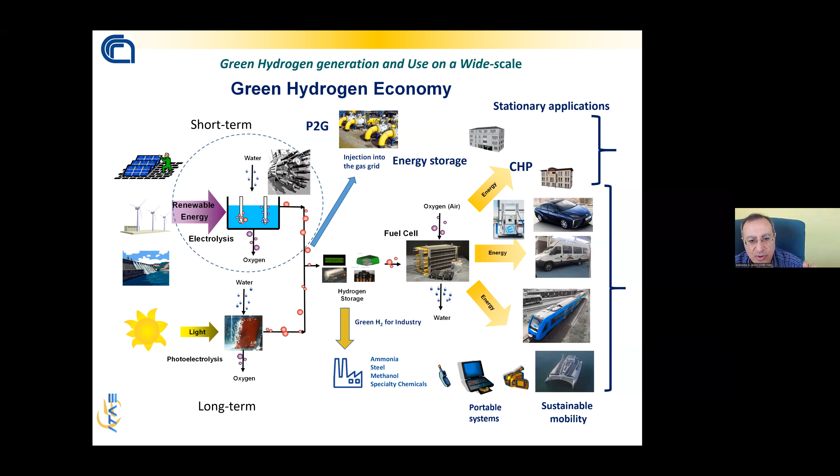And now we can move to the next slide, where I can mention some other important aspects of why green hydrogen is so important. Green hydrogen can provide seasonal storage. That means, especially in small islands, you can store energy for, let's say, 6 months or more. Hydrogen can be used for grid balancing services, because renewable power sources are intermittent, and in some periods we have a surplus of renewable energy. That means hydrogen can convert the surplus of renewable energy into chemical energy that can be stored and used later when needed.

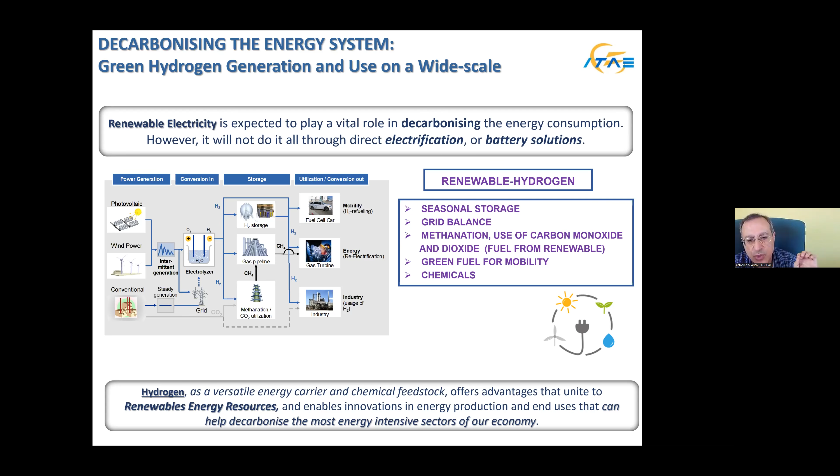Hydrogen can be used for methanation, to convert carbon dioxide into renewable green fuels for mobility and for other applications. So there are several applications of hydrogen. That's the reason why in the European Union, and also in countries like Korea, Japan, the US, Australia and so on, there is a national strategy on hydrogen, because hydrogen is seen as the new energy vector that will contribute to decarbonizing the energy system.

However, we need a reliable technology to convert efficiently renewable energy, especially the surplus of renewable energy, into chemical energy, into hydrogen. And electrolysis is the best approach for that.

So there are several electrolysis technologies. I'm focusing today on low temperature electrolysis. Of course, there is also high temperature electrolysis that has also good perspectives, but at the moment, low temperature electrolysis seems to have slightly better perspectives.

We have 3 technologies for low temperature electrochemical water splitting. Alkaline electrolysis, well-known, mature technology. PEM, polymer or proton exchange membrane electrolysis, and AEM. AEM is anion exchange membrane electrolysis.

The difference is that in the alkaline electrolysis, we use just a porous separator. I'm showing here this porous separator, and we have some recirculation of concentrated KOH, of caustic solution. So this is the approach used in the alkaline electrolysis. And we have at the cathode hydrogen evolution and migration of hydroxide ions to the anode, where we have oxygen evolution.

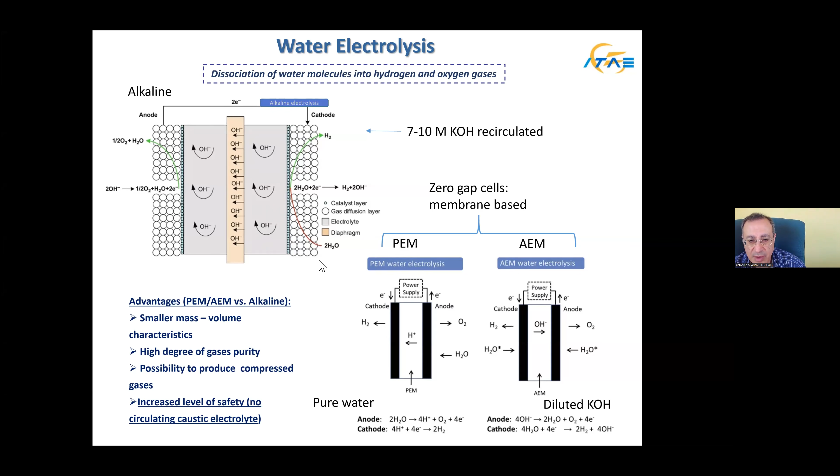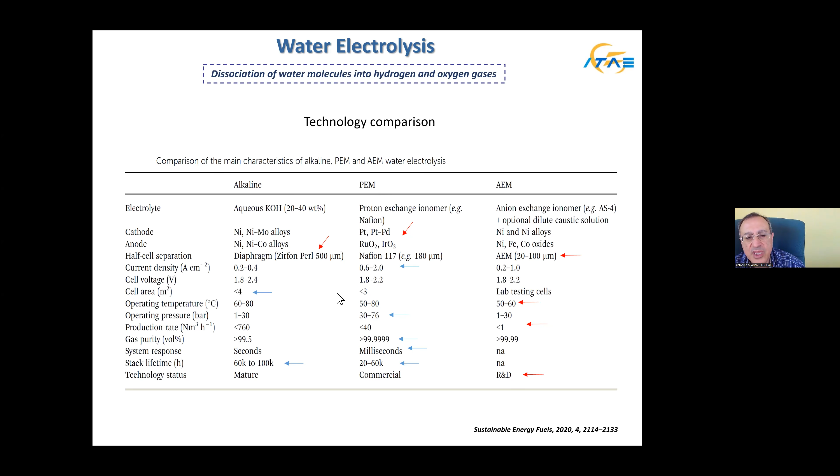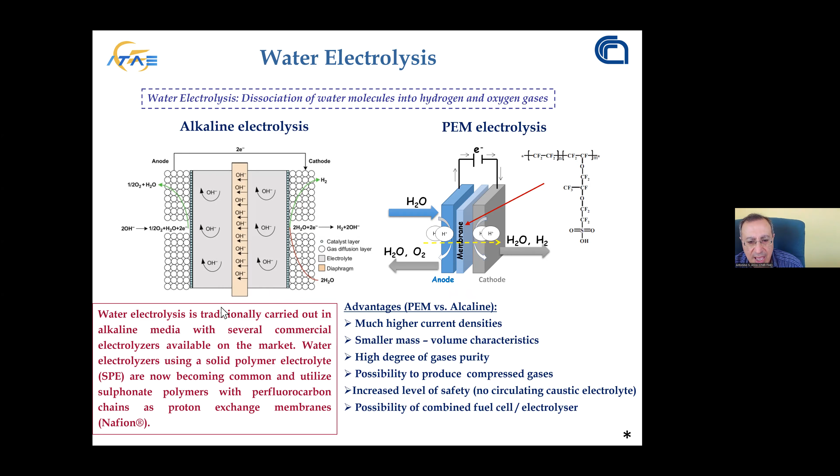So just to summarize this part, polymer electrolyte membranes have advantages versus alkaline in terms of much higher operating current density, compact system, higher gas purity, high pressure, increased level of safety. So we have a cheap technology on one side, and another technology that is not cheap, but I would say cost effective, because we have other advantages. And we need to develop both technologies in parallel, because we don't know which strategies should be implemented in the future.

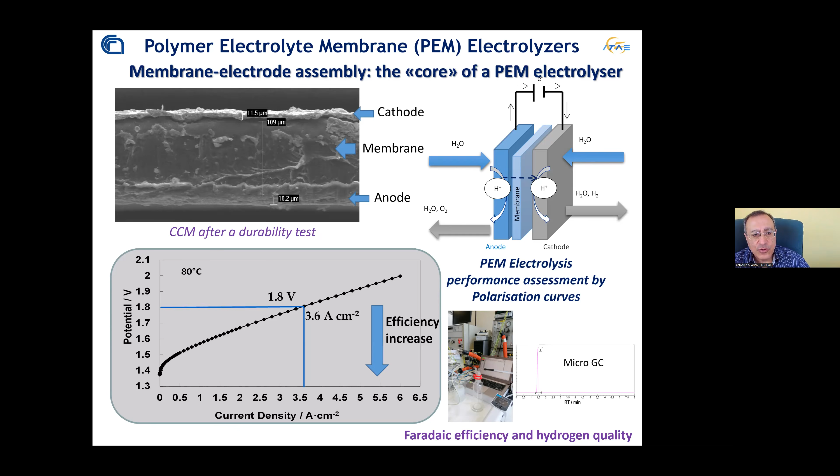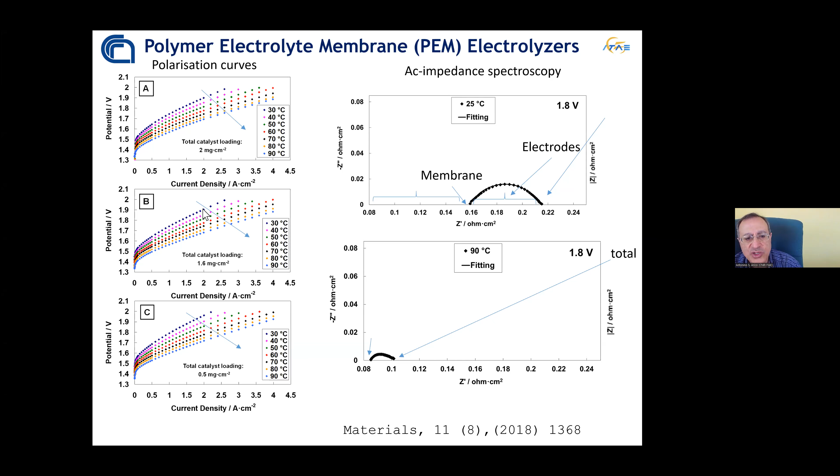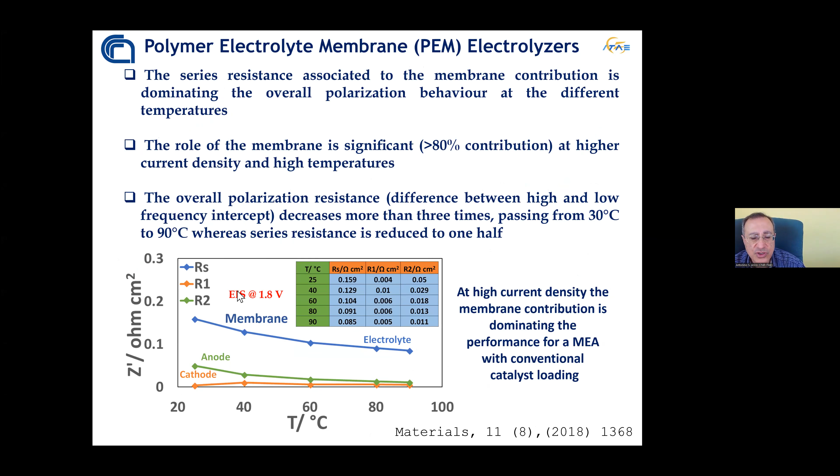And of course, these results can be plotted as a function of temperature. In this case, we can see that the membrane is dominant compared to anode and cathode contributions in terms of resistance.

Now, let's move a little bit to the materials aspects. I know, Ashok mentioned, that some of you are involved in material science. Of course, materials are extremely important in this field because the core part of this technology is made of functional materials. By functional materials, we mean electrocatalysts and membrane.

When we started, I will say, 15 years ago to study electrolysis, we were focusing on nano-sized amorphous iridium oxide nanoparticles for the anode. And after several years, we realized that the crystallographic structure plays a relevant role. That means intrinsic activity is extremely important, and we need specific crystallographic orientation. As an example, in this case, we have a solid oxide solution between iridium oxide and ruthenium oxide.

What about the membrane? Nafion is used widely throughout the world. Nafion is produced by DuPont.

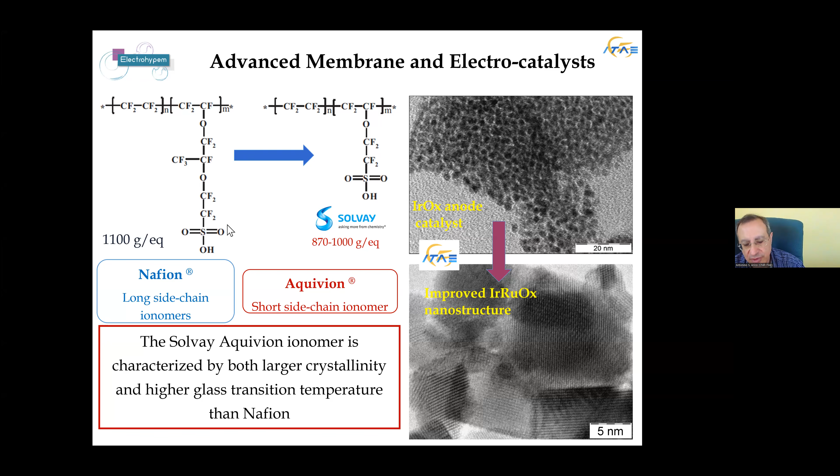Better dissociation. But Aquivion has also high glass transition temperature, has a good crystallinity, so it is more robust than Nafion. And this was shown in several papers that we published together with Solvay in the past years, showing lower series resistance, better conductivity, but also better interface with the electrodes.

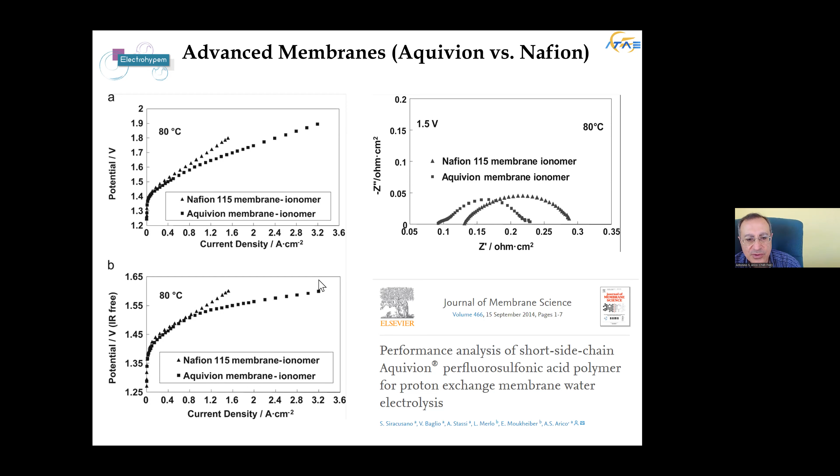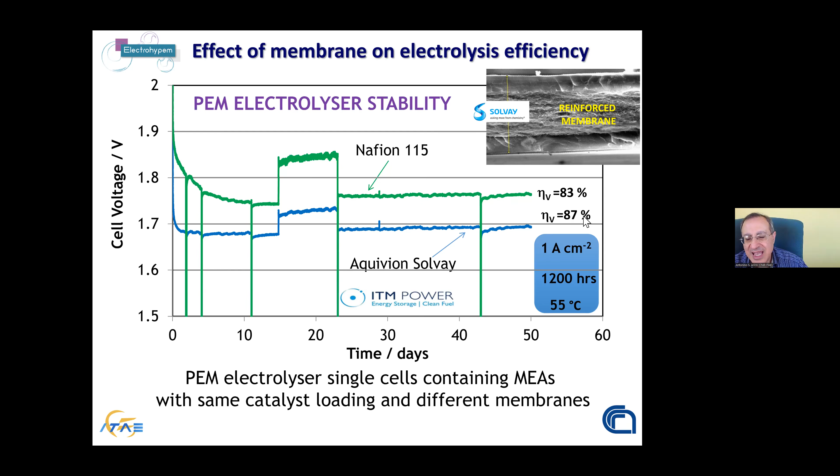And our colleagues at ITM Power in UK have shown, using a parallel experiment, that means two plants running in parallel using the same feed water in order to avoid any interference from other effects, that the short side chain Aquivion membrane shows a much better efficiency: 87% voltage efficiency compared to 83% voltage efficiency of Nafion.

And now just jump into the technology. We have here the renewable power source. This is the Electrohypem project. It was a project that I had the honor to coordinate several years ago, using a small wind turbine, producing an intermittent power profile, because wind is not stable. Wind energy is fluctuating. And using this reactor, we were able to demonstrate extremely high efficiency and good dynamic behavior.

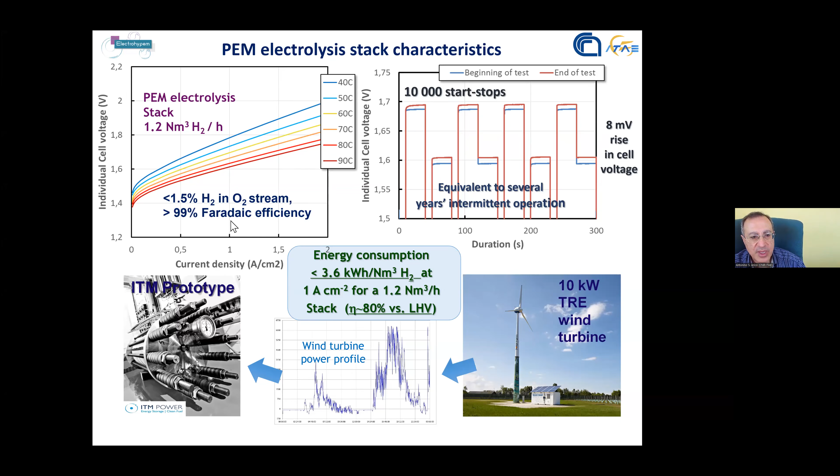And just remaining on the technology, in a subsequent project, HPEM2Gas, we combined enhanced materials, membrane and electrocatalysts, into this MEA. This is the electron microscopy picture of the MEA: the electrodes and the membrane between. This has been installed into these stacks. Each stack is something like 75 cells. And these, of course, can be installed in a system. At the end of the day, we need a system to address the real life application.

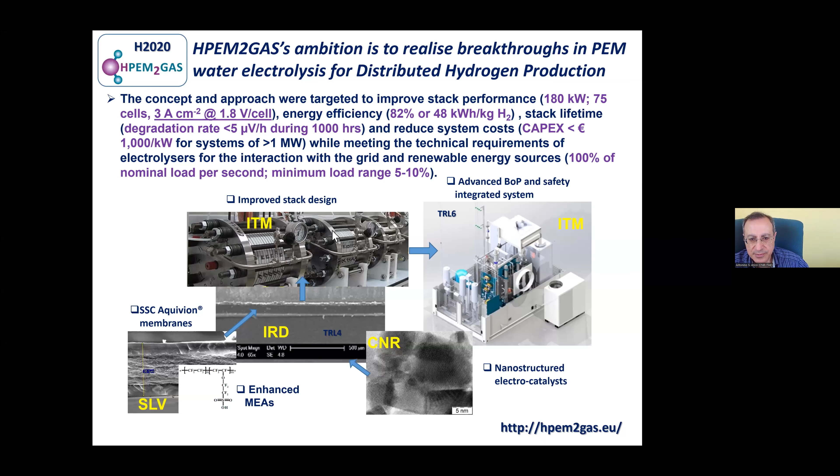But it is important to keep high current density at cutting edge efficiency, low energy consumption, high durability, that means low degradation rate. And all these aspects can make low the capital costs of these systems. Coming back to the materials, I'm showing you something related to the materials and something related to the technology in order to emphasize that the key advantages we can achieve on the materials reflect on a much better, much more efficient technology.

I have mentioned that the crystallographic structure plays an important role, especially for the anode, for the oxygen evolution reaction, that is a rate determining step. We need small particles, but still at the same time crystalline. You can see this is a dimension of 5 nanometers. You can see here iridium atoms in a squared particle. This is really an atomic image of the structure that we want to have in the catalyst, offering a well-defined crystallographic orientation 110 that provides the best catalytic activity.

But this is really a specific situation. Usually you have a mixture of several particles, and also you want to have good distribution of the elements. As an example, in this case, ruthenium is inside the particle. Iridium is on the surface of the particle in order to achieve good electrochemical activity and also good stability.

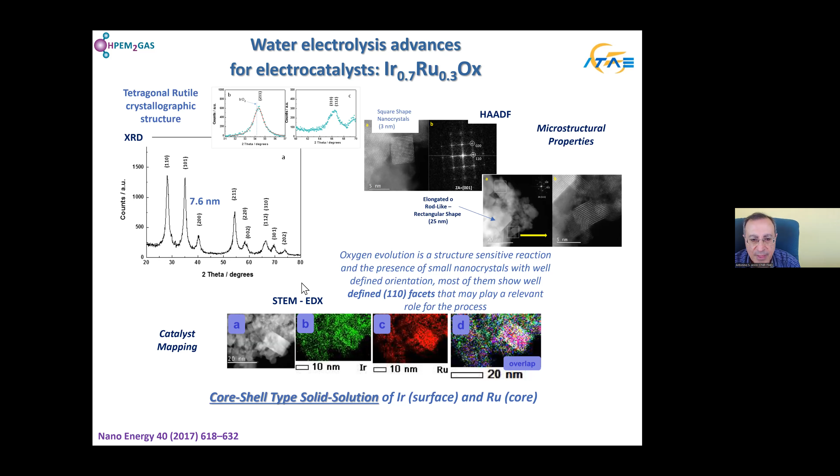And we have observed that there is a relationship between degradation rate and the turnover frequency. Turnover frequency is linked to the operating current density and to the reciprocal of catalyst loading. So if we decrease the catalyst loading and increase the current density, we have a higher degradation rate. This means that there is still a long way to go in order to develop stable and highly performing electrocatalysts.

So I think I have provided some overview about the technology, and I think we can have some initial questions or comments. So I would like to ask you if you have some burning questions or comments. Any questions or comments? So is everything clear with you? Okay, so we'll postpone questions and comments to the end.

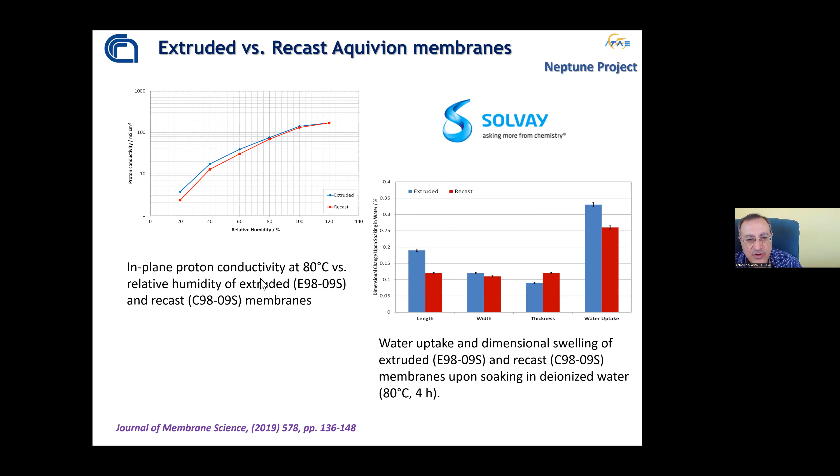Now, coming back to the membrane, we have discussed a little bit about catalysts, but now let's come back on membrane. So how to assess the properties of the membrane? We, of course, measure proton conductivity as function of relative humidity, and we also measure the so-called dimensional swelling, because we need to have a stable membrane. And this is for the Aquivion. And of course, you have different approaches for preparing a membrane. You can have cast or extruded membranes.

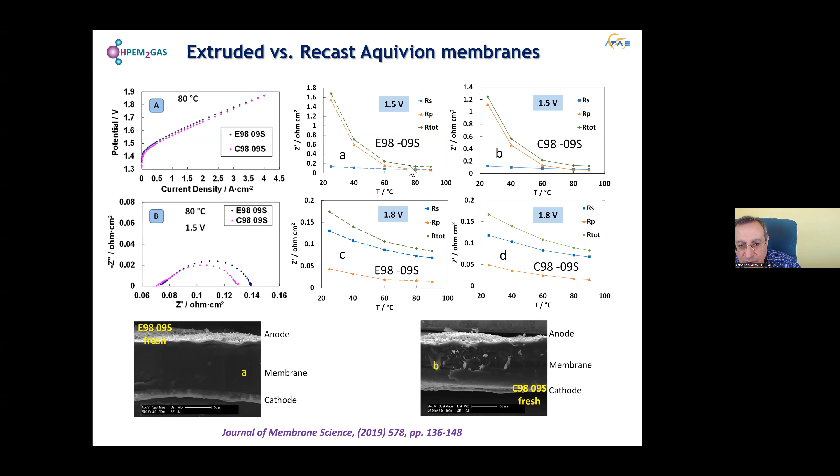Here are some pictures of the MEA, and you can see not much different in polarization resistance, and of course similar variation of total resistance with, let's say, temperature. But regarding stability, we can clearly see that the cast membrane is better performing than the extruded membrane, lower cell voltage at the same current density. And with the cast membrane, we can reach a current density of something like 4 amperes per square centimeter.

But another important aspect to consider is dealing with hydrogen crossover. I have mentioned that the membrane is fully dense, but in principle, since there are some water channels inside the membrane, you can still have some gas crossover. Regarding the gas crossover, the concentration of hydrogen in the oxygen stream becomes lower when you increase the current density, because you have a lot of oxygen evolving that will dilute the hydrogen permeating through the membrane.

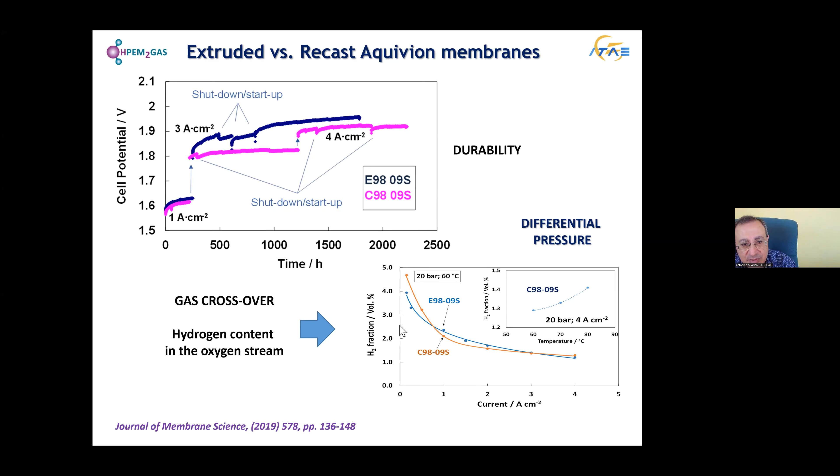But it can be critical at low current density, because at low current density we can achieve the flammability limit. The flammability limit is 4% hydrogen in oxygen. This must be avoided. The safe operating range is below 2% of hydrogen in oxygen. And this is really an important aspect to address. How have we tried to solve this issue in our PEM technology? We have introduced the concept of the recombination catalyst.

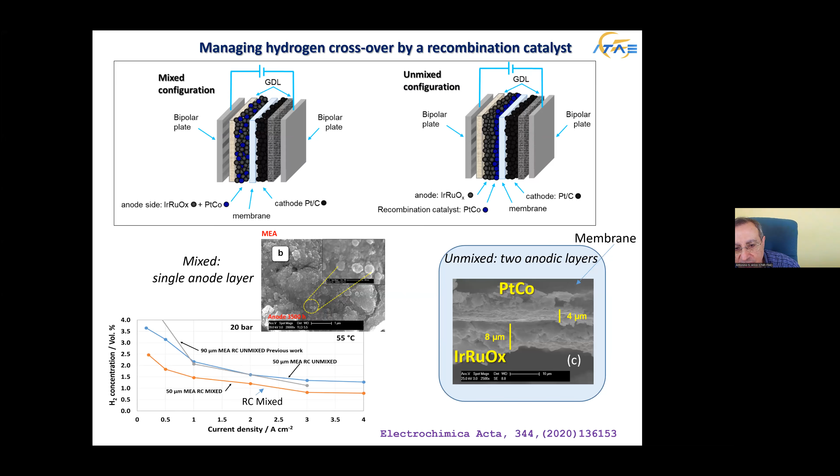The recombination catalyst is a platinum-based catalyst that can be mixed with iridium oxide at the anode, or you can have a dual layer. So when hydrogen permeates through the membrane, the first layer it passes is the platinum-based layer. Here, hydrogen can recombine with the evolved oxygen, or can be electrochemically oxidized. So using this approach, we can achieve high differential pressure operation. That means pressurized hydrogen, non-pressurized oxygen. Why pressurized hydrogen? Because we need to reduce the energy consumption in the downstream compression of hydrogen.

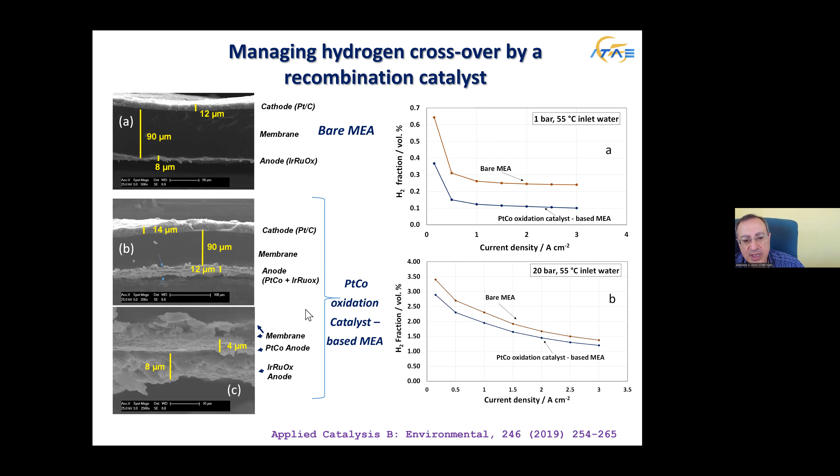So this is a clear example. Using this recombination catalyst and using a bare MEA, we have a much lower concentration of hydrogen in the oxygen stream at the anode in the presence of the recombination catalyst. And this is the dual layer that is perfectly operating for recombining this hydrogen. And you will be interested in understanding if, using this recombination catalyst, we still have good durability. This slide shows tests of 3,500 hours, something like 4 months. In this test, of course, we have some startup shutdown in between because of laboratory maintenance and so on. But what you can clearly see is that using the recombination catalyst, we also have better durability.

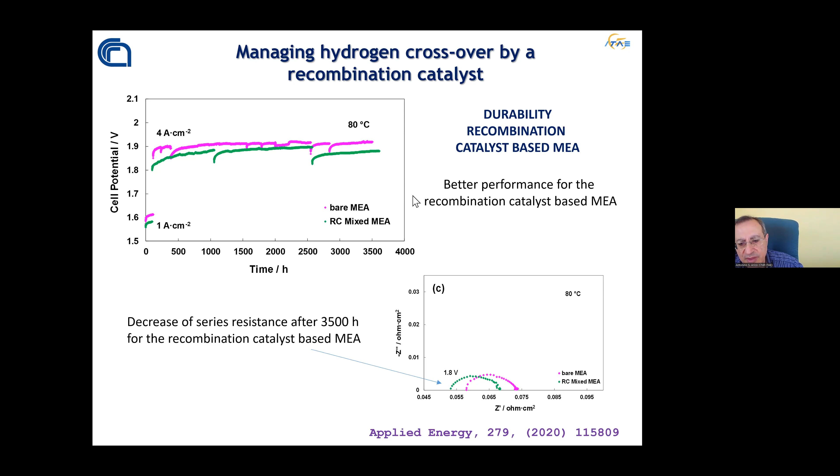And of course, we use a lot of post-operation analysis in our laboratory to understand membrane thinning, to understand changes in morphology, to understand if degradation is related to these aspects. Now, again, I jump into this technology. What is really important for us is that all these concepts are validated in a practical stack.

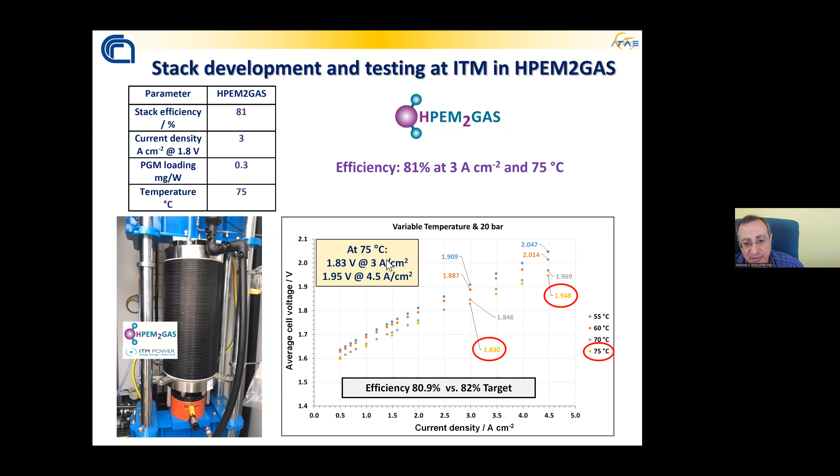And in this case, we use hydraulic compression. You can see that there are no tie rods here. This is a hydraulic compression in order to have a compression that is homogeneous through the cell. Using this approach, using the enhanced materials, we have achieved extremely high performance at cutting edge efficiency.

So the grid operator has to cut this surplus of electricity if, of course, there is no need for this electricity. But we can store this surplus into hydrogen and use it later, as an example, in summertime. This wind energy surplus is essentially in January, February, and December, of course.

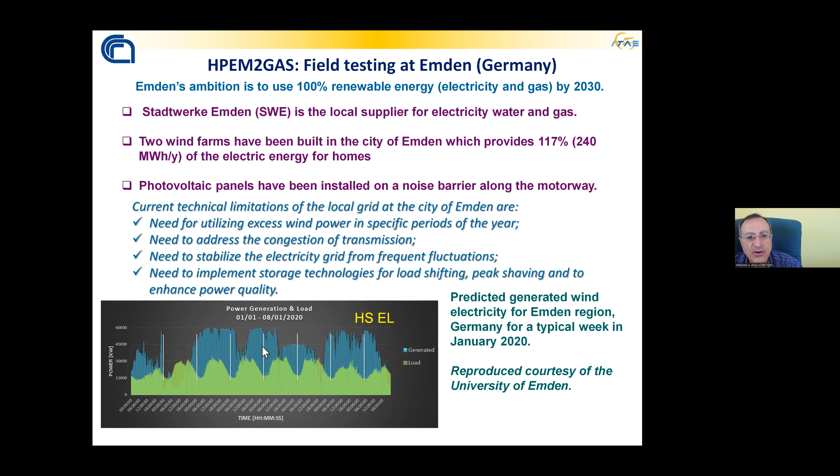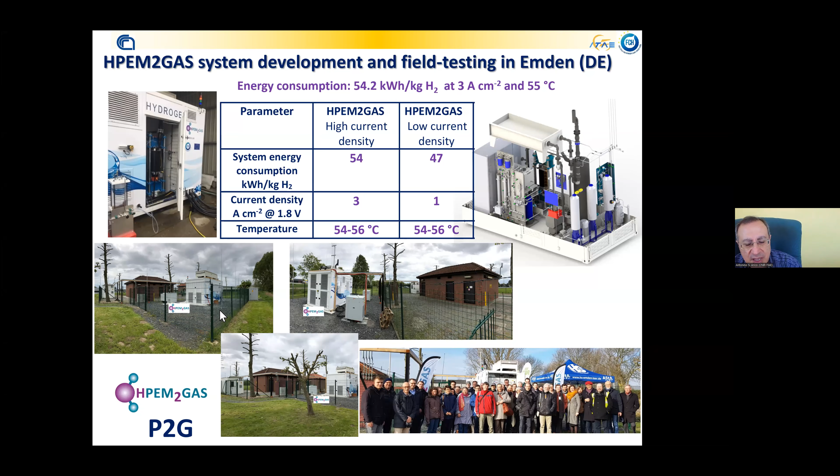This is a picture of the inauguration of the plant. You can clearly see it is a very compact electrolysis system. So we don't need cumbersome plants. If we can operate at high current density, we just need very compact systems. And this is a proof of how the technology is validated in real life.

Of course, we have also observed during the operation of the system that degradation under duty cycles was a little bit higher than under steady state. Degradation means a loss of efficiency with time. This is essentially related to the electrode behavior, much less to the membrane. These are, as an example, MEAs dismantled after a prolonged durability test, showing very little membrane thinning. Also, the catalyst morphology is not changing much.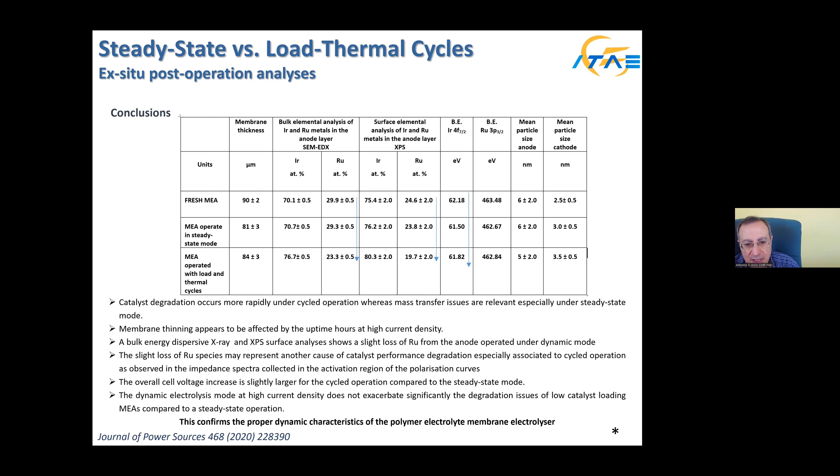This is clearly represented in this table, where you can see the change of the atomic percent of ruthenium. Ruthenium is providing extra activity to iridium oxide, and this is an important aspect, and also the changing oxidation state. So this is also part of the material science studies that we have carried out around this technology. So not only validating the technology under real life operation, but also trying to understand which drawbacks should be overcome to provide a better perspective for the future.

And now discussing the future, the reinforced membrane, the membrane that uses this PTFE polymer net inside, in the core, and the ionomer on the surface, is the best approach for the future, because we have a robust polymer inside that can allow operation at extremely high pressures; 100 bars would be possible using this approach. And we can see that using this approach, we also have nice performance, better than the extruded membrane, as you can see from the shift of the series resistance in the AC impedance spectroscopy curves.

And durability is another important aspect, because in this case the degradation rate is very low. So to make an estimation of the degradation rate, you need to operate your cells for about 4, 5, 6 months. Then you can really understand durability and make an estimation of the degradation rate.

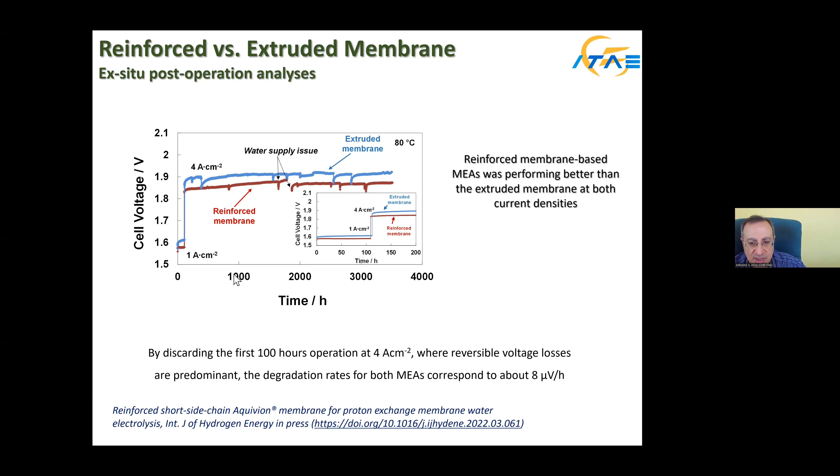And you can see that the reinforced membrane is characterized by better efficiency, but also a low degradation rate. In this case, we had a water supply issue, and you can see the efficiency was decreasing immediately, but after solving the problem, we achieved a nice efficiency. Also, using reinforced membranes, we have a nice interface with the electrocatalysts.

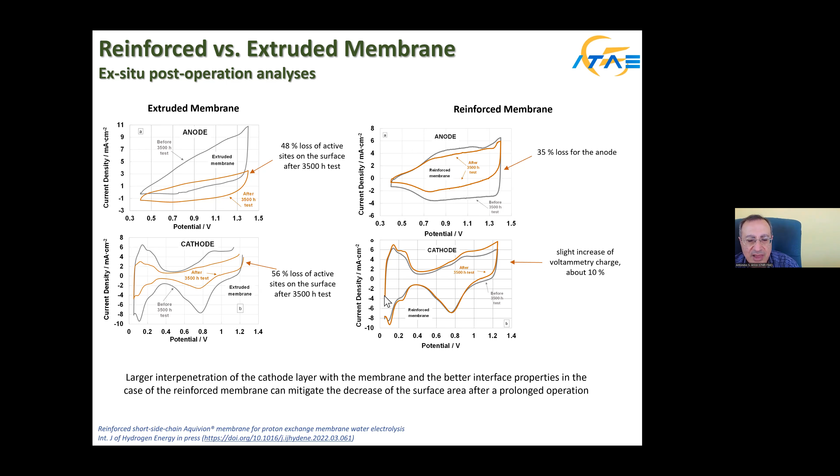As you can see from these cyclic voltammetry studies, you can see the nice cyclic voltammetry from the cathode, and also nice cyclic voltammetry for the anode. The cathode is not changing much after 3,500 hours operation. Some changes are observed at the anode. You can see decrease of the capacitance. This is also another important in situ diagnostic tool to understand variations, and also ex situ SEM, EDX, and XPS are really important.

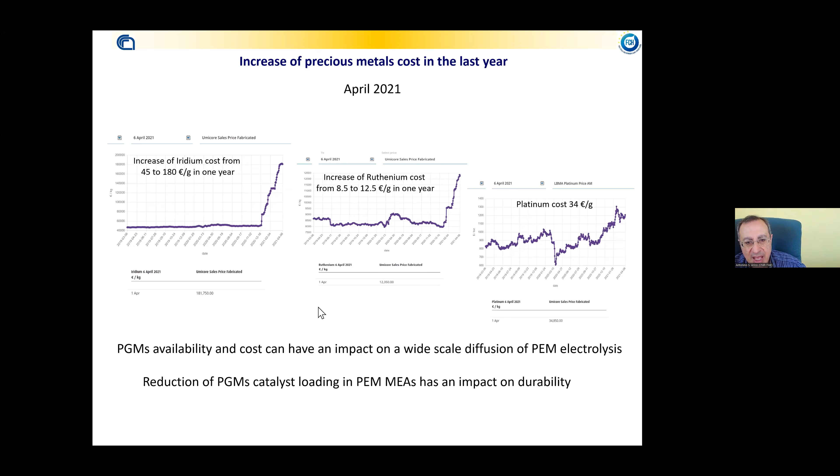I would like to mention an important aspect, that is the cost of precious metals. This has dramatically increased in the last years. So of course, this is really a big challenge for PEM electrolysis, because the cost of iridium, ruthenium, and platinum is dramatically increasing. And to address this aspect, we are now moving little by little to the AEM electrolysis technology that is similar to the PEM, but since it operates in the alkaline environment, doesn't use any critical raw material.

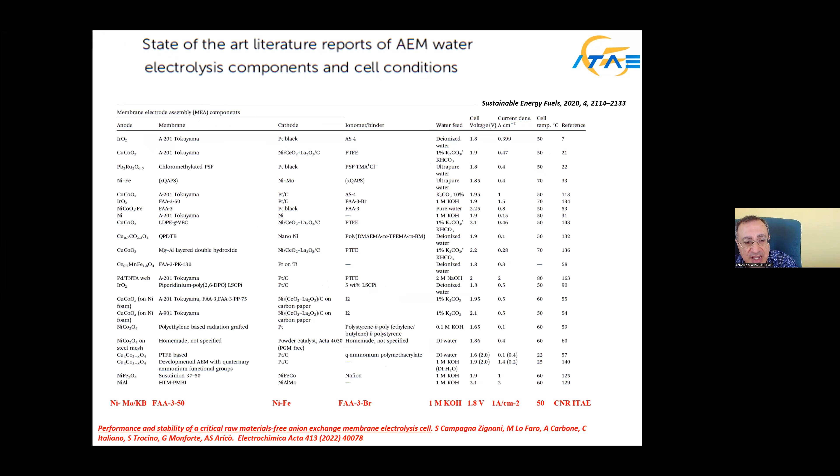And as shown in this slide, with anion exchange membranes, we have a membrane that could be reinforced, we have a high differential pressure, we have essentially nickel iron and nickel molybdenum oxides as electrodes, and we have steel, not titanium. So we have cheap materials in this case. And of course, we have a lower conductivity for the anion exchange membrane compared to PEM, 50 millisiemens compared to 200. That means lower performance.

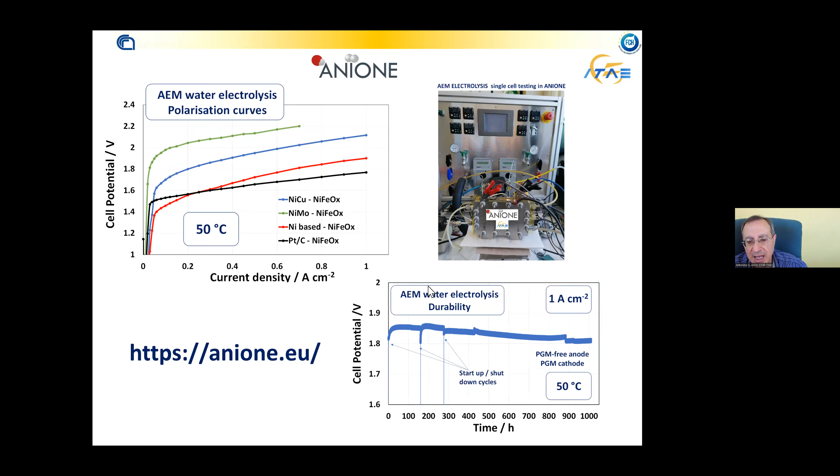But still, what I want to show is that, in the case of AEM electrolysis, using non-critical raw materials like nickel, nickel iron oxide, we can really achieve a good efficiency and a good durability. In this case, a nice durability because we have a decrease of cell voltage with time. That means increase of efficiency. And this is a small prototype, 100 square centimeter. Of course, this is the new frontier in the electrolysis technology. But still, 100 square centimeter is nice to really study the performance.

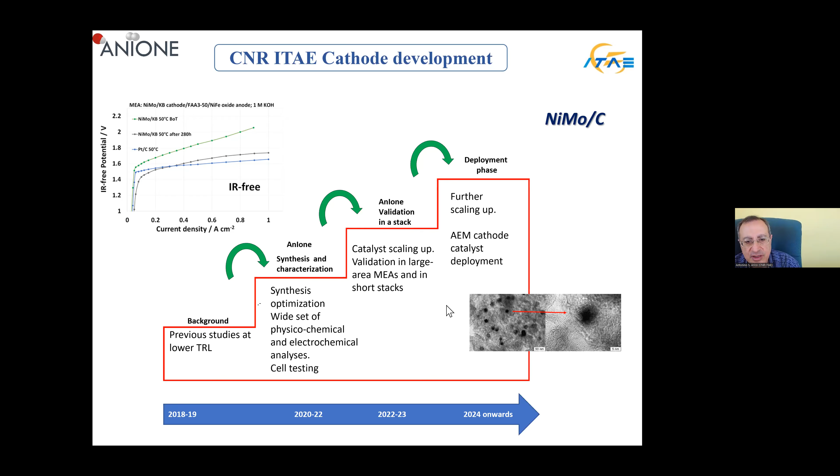And of course, we have a roadmap to improve the anode electrocatalyst and also to improve the cathode electrocatalyst. The anode electrocatalyst is unsupported, small particle size. The cathode electrocatalyst is supported on carbon. We cannot use carbon at the anode. Carbon will be oxidized and burned to CO2. And also in this case, we have good durability. These are tested to 1,000 hours, but with a new drawback, that is the reversible losses. You can see some reversible losses when you have a startup, shutdown.

So the dynamic behavior of AEM electrolysis is not as good as PEM electrolysis. And we also need to recirculate some KOH to enhance a little bit the conductivity. 1 molar KOH. When we decrease it to 0.1 molar KOH, you can see there is a loss of efficiency and increase of cell voltage. This is another important aspect.